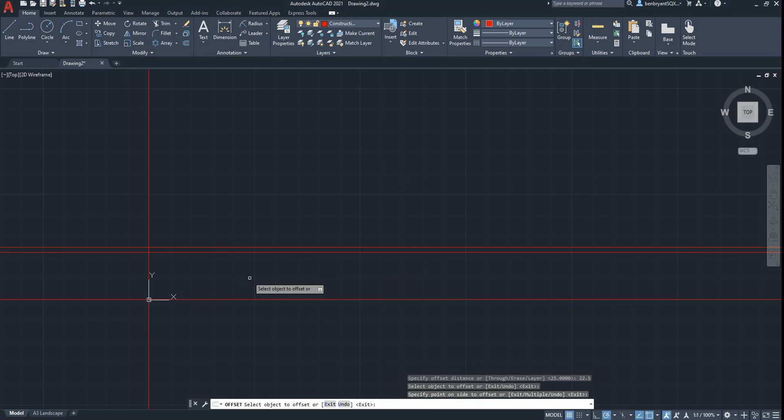Apart from there is the end section, which is against 25, so I'm going to put that as 12.5. And again, there's another kind of chamfered component on there, but you could put that one in. It's just be 2.5mm less from our view, but I'm not going to worry too much. I'm going to use the chamfer tool rather than hand draw the chamfer anyway.

Offset, okay, 65 coming across. I've got 10 coming back, I've got 8 moving forward. 15 off of the 8, and last one 28, which my brain can only hold so many numbers in, like so.

So it may not seem like it, but that's the actual half view for the screw jack. And a bit like if you're not happy with colours, working in layers, feel free to change the layers, make more, or change to the colour output, like what we've done on the casting video, which is day 19 if you haven't seen it, and then day 20 is the other piece as well. So into my drawing layer.

I haven't bothered to put any of the other sort of rundown components, because what I'm going to do is that traditionally, if you look, there's a type 2.5 chamfer, which means it's 2.5 across, 2.5 high, and it'd be 3.54 if you use the Pythagoras to get the actual diagonal.

What I'm going to do is I'm going to use AutoCAD. Most people would normally do this: offset 2.5, so you come 2.5 out by 2.5 down, which essentially is the 45. And what you would do is you bring a line in, and then you measure it and you get that to be like 3.58, 3.54, okay. So that's one way to do it.

But we're a bit more sophisticated than that now, we're actually just going to use the Chamfer Tool. So loading the chamfer tool, it asks you then for the first line, so we want distance, we know it's 2.5, second distance is 2.5, M for multiple. We can come along now and chunk out those sort of pieces.

So we can actually build our lines this way. Now what you're probably looking at here is that 45 is actually the bottom line. I've just drawn one big kind of area, so actually what I need to do is remove those ones off. That line should technically be there, and then I can actually now redo the chamfer.

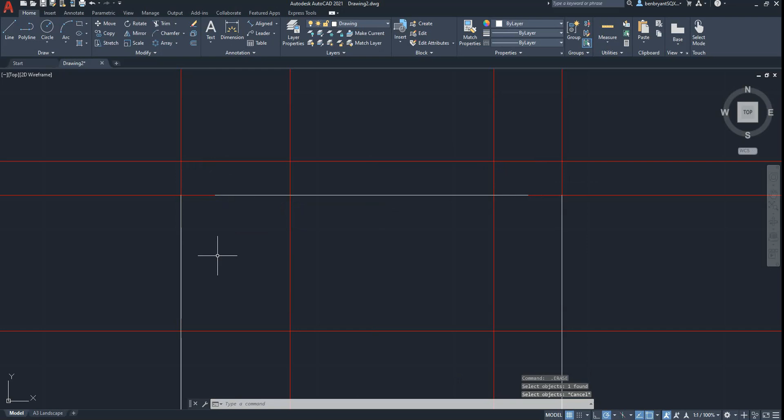Okay, so now I'm going to bring it along, and I've got another piece which is on the 50 line. I know the measurement is there to there on that one because it's the 15.

So again, using the chamfer, draw a line down like so. Now when you look at the drawing, it includes the chamfer, so we know that bit's right.

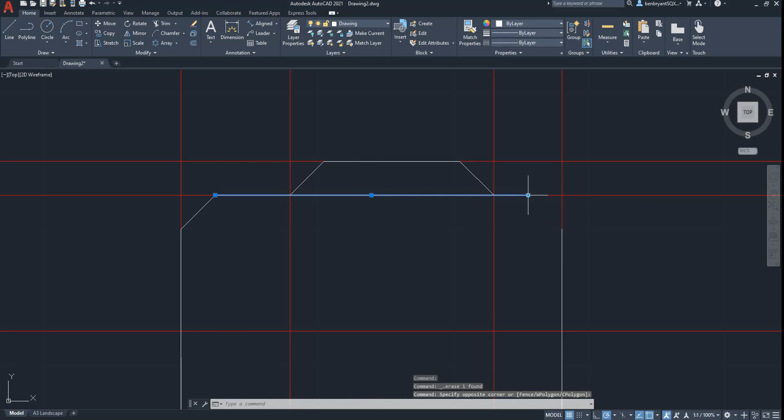Then we have the 28. So it's not actually a chamfer on this side because it extends into our larger chamfer. So I'm just going to close this one back off, like so, and I can just trim out that middle section so I've got my profile like so. So that's our first kind of up, chamfer, cross, chamfer, down.

So we're at the 28 lines. Now we're going to do our 10. Again, I'm just going to do exactly the same. It's just going to come up here, across, and then it should be an angle of 20.

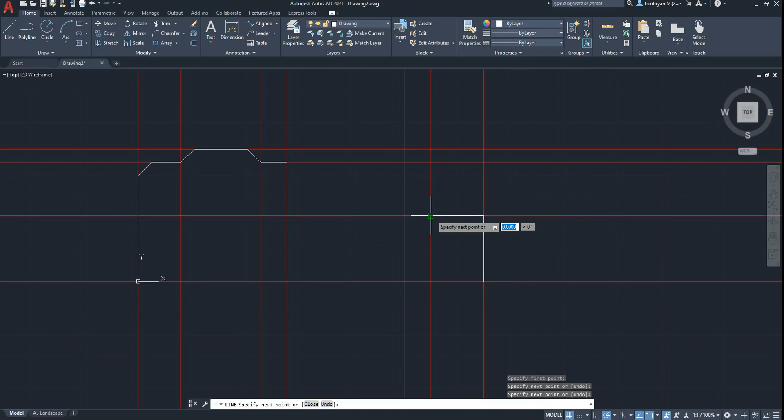So again, we can test the angle if you've done it right. 160, or 20 internal, which is correct. That's what the angle is saying there.

So we've got to do a chamfer on the end. Again, 2.5, which we're happy with. And pretty much that's the first profile.

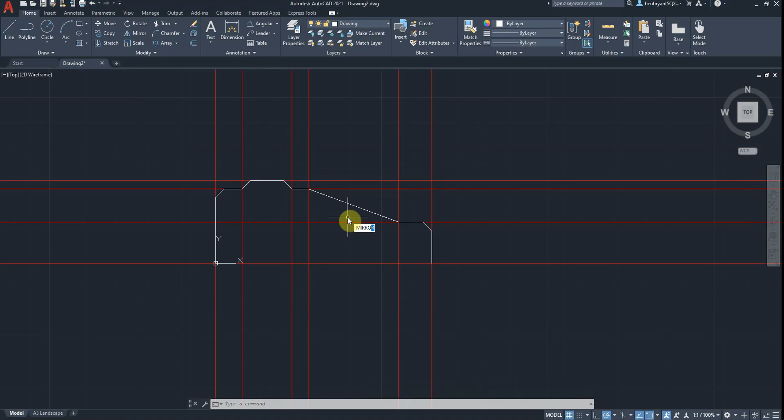So then again, mirror now, and then you can rotate around. Now before I do that, if you notice, I've got lines coming down, so I'm going to put all those lines in first, because it means I'm not having to cover twice the distance.

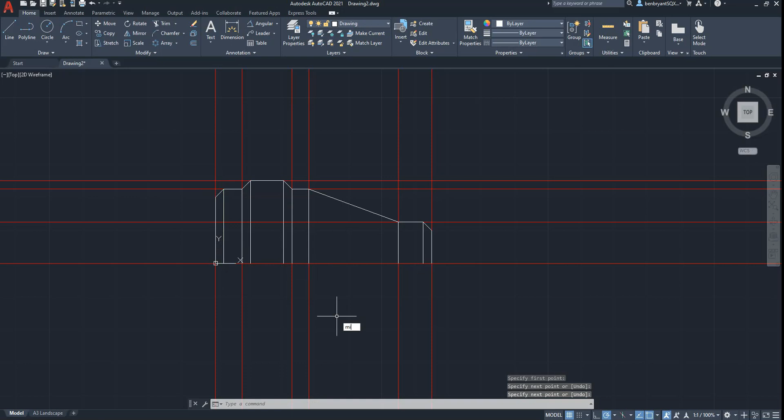Okay, remember to do the chamfer ones as well, so just a bit of quick flying around. Because if you're like me, sometimes you always forget to do the easy stuff first and you end up spending twice the amount of time.

Like so. So there's our first kind of shape, nice and straightforward. Okay, remember to give yourself some room. So I've just given myself a 50 distance, simply because it's 50, so I've got to keep pressing the command, and just build like a center point.

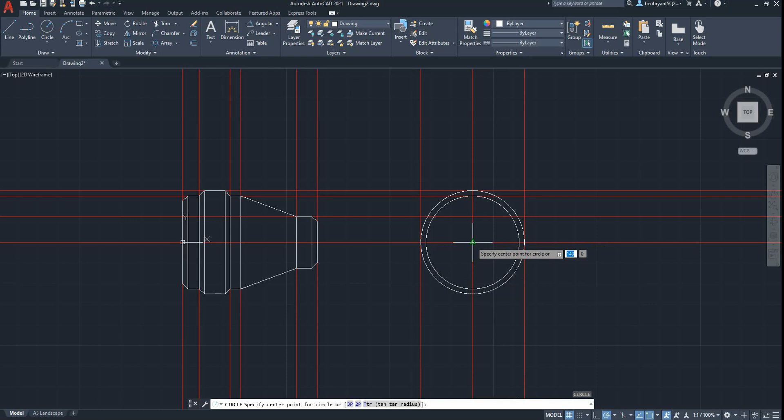And then just come in radius 25. Offset, which would be the 2.5mm chamfer in this stage, coming in. Last one, 25 diameter circle. D25, offset 2.5, and that's then built my circles.

So I've got both views now. Okay, so next thing to do, I'm just going to do another offset. I'm probably going to offset 25 to get the bottom, and then do probably 50 again. And then what we're going to do is put this other section in.

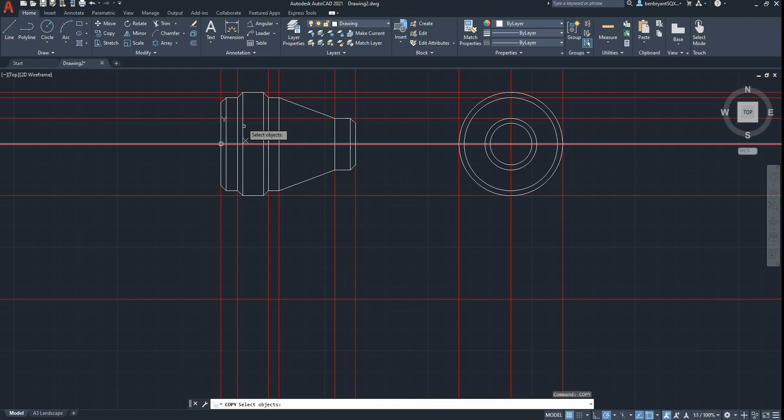So what I'm actually going to do is, rather than draw the profile again, I'm just going to copy this one down, like so. And what I can now do is I can now strip apart the external with the internal.

So I'm going to put in some key lines so I don't delete too many, but I need to put 30 into 15 from the center. So, offset 15.

15 up, 15 down. Now again, if you've seen other videos, you can either make another layer, so I've got a vision layer which I'm going to use, or you can just change it by color on there as well. You've got 15.

This one here I've got to do is 12. So I'm going to do offset 6. And again, just choose those two into my vision, like so.

And obviously then this is M12 times 1.75, so there's a thread in there as well. So what we're going to essentially do is offset 0.875, which is half of 1.75.

Now, people always say, oh, you need to double check this. It's because it's a drawing, you're going to put a tap and die, so your operator that puts the tap in should know what size. So it's 10.2mm drill, and then you tap out to M12.

So technically speaking, I've actually just done that the wrong way around, so you've got to make sure that you're internal, not external, because the external is 12. 0.875, like so. There we go.

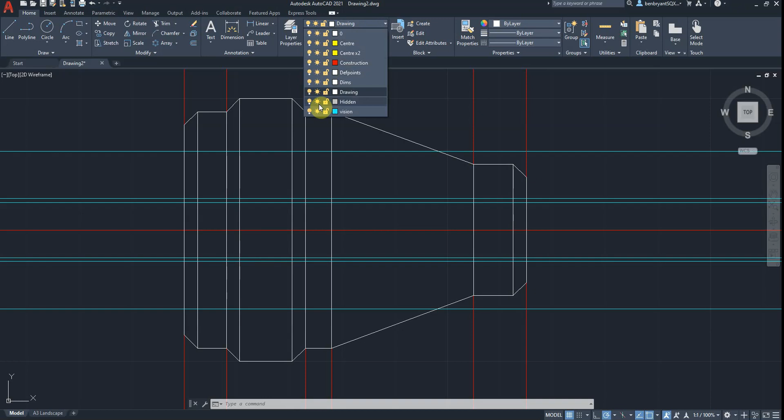That's that section now. So again, all I've got to do is just draw. Now if you actually look, this line matches up with that line above, so all I'm going to do now is just turn this stuff off, which may seem a bit bizarre, but I'm going to turn my construction line off as well.

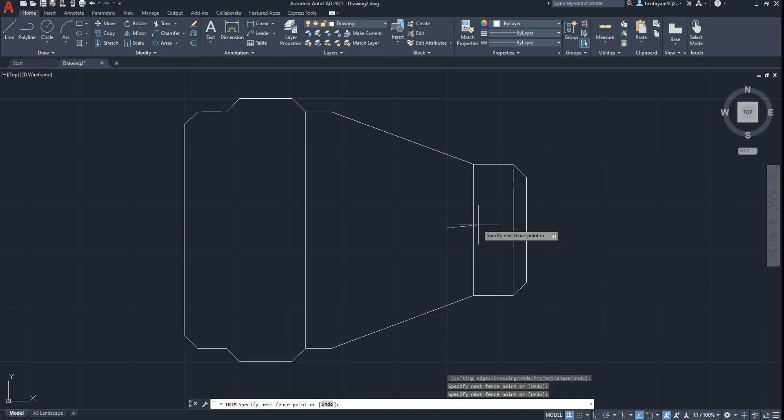And now when I operate the trim, I need to get rid of all of that, all of that. Okay, coming back, no other lines exist, so let's get rid of that one and that one. That line there is a manual line, so I can get rid of that one and that one.

I think I can get rid of that one as well, and get rid of that one. I need to keep the external one.

So those are the lines that I've just had to bin off. I'm going to put my construction back in. So what we're going to do is draw a line. Again, you can just do it in half if you really want to. Bring it up to the point of that line, which is like our first rectangle bit there, this bit. Then we've got a 20 line. So now I'm going to bring the 6 in.

Okay, we don't know where this meets, so I'm just going to drag it through, and then all I'm going to do is just bring a line. So 360, bring a line through, so 360 minus 20, so 340. That does seem a bit aggressive there, so we're just going to double check.

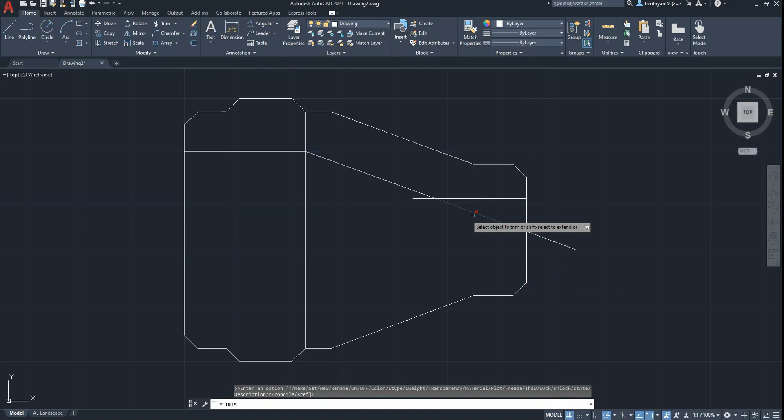There we go, 20mm. So again, now we can basically trim this back. Again, turn your layers off so you don't have to trim multiple times. Get rid of that one, get rid of that one, get rid of that one. So that's like my inner profile now. So we just put these ones back on. Okay, that's like my inner profile for my line.

So the 12 should be longer than the 10 essentially. So I may need to actually bring that line. If you latch back on, hopefully, and you get that kind of green line, let's say. Now what we need to do is bring our secondary line through, which will be like the bottom of our thread. Again, then trim that out, like so. And you know that the thread will have a little lead in, so...

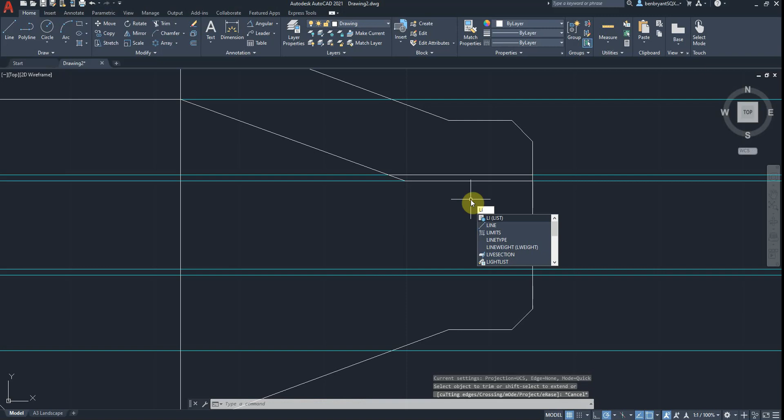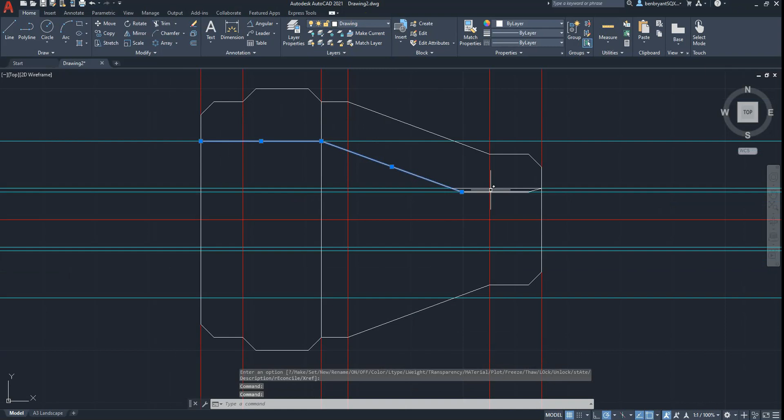Which we've matched up to the lines of the chamfer, to be fair, like so. That's sort of what we're going for here now. So all we're going to do is, if I populate the construction line back in, I get my center line. 1, 2, like that, mirror around the center point, keep the original source.

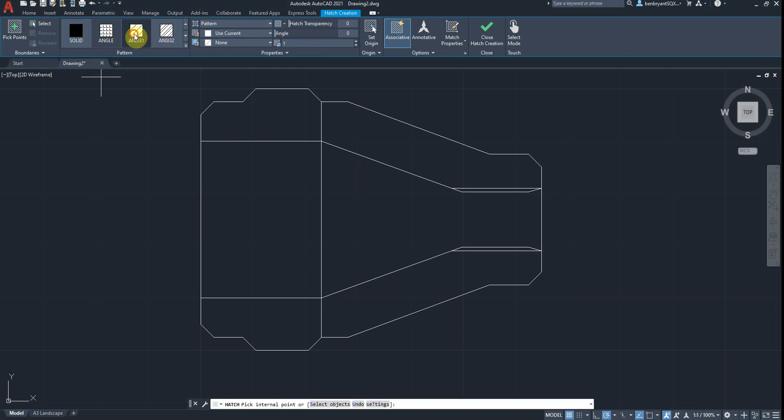Now I can turn all these lines back off again. Like so. So that's sort of the section that we've now got. And that's our 30 point, our angle 20, got our thread. So all we need now to do is put the hatch in this one. So again, just going to use ANSI 31. Like so, there's my hatch, just to say it's the straight through.

So what we can now do is actually make another layer. So we're going to call this section view. I'm going to change the line type to like a phantom line. So we go into line type phantom. Okay, so I want it white.

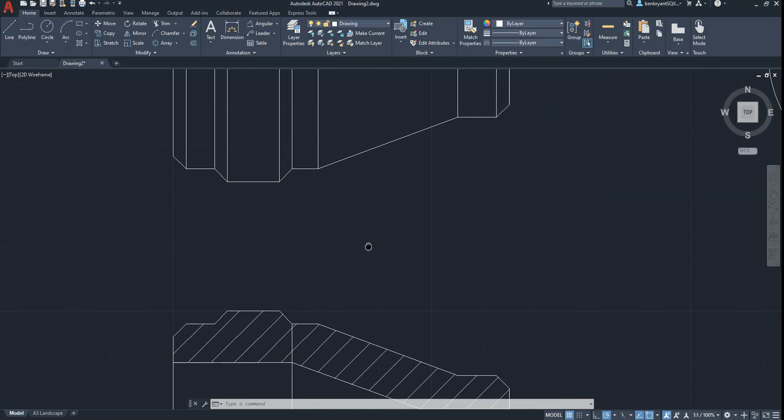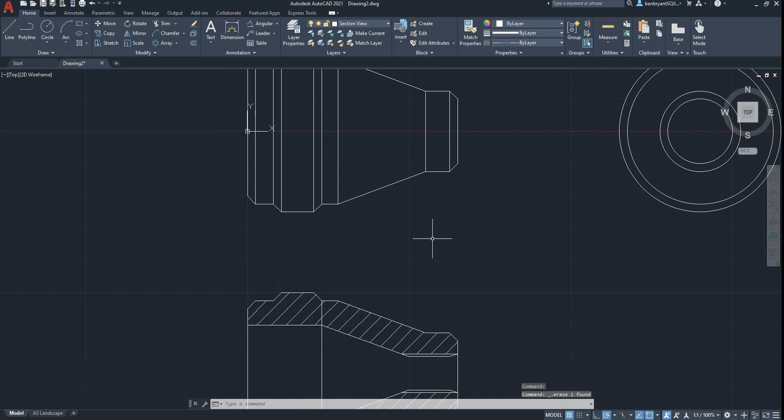And what I'm going to do is on my section view, if we basically draw a line, you get this weird kind of double dot. And what I'm now going to do is make it thicker, so I'm just going to change the default line weight to 0.5, just make it a bit thicker. It basically represents then a proper section line. So you don't really see a difference, but you see the difference on the output of the printing.

So all we're going to do, turn our construction lines back on so I can match up the centre line. I'm going to do 20 mil over, so I'm going to find a point, drag it over and type 20 in, and then come to my last point is 85, so that'll be 105, I'm now going to, like so. So there's my sort of my line.

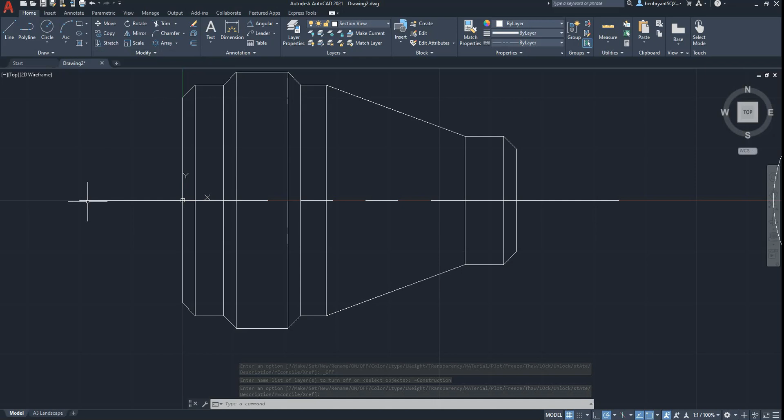Now I need an arrow pointing up to say that this is the bit that I've sliced. So I'm going to do a Q leader. I'm going to do that 2.5 mil high, or maybe a bit more to get the arrow in actually. Oh, okay, it's just going to rotate my line.

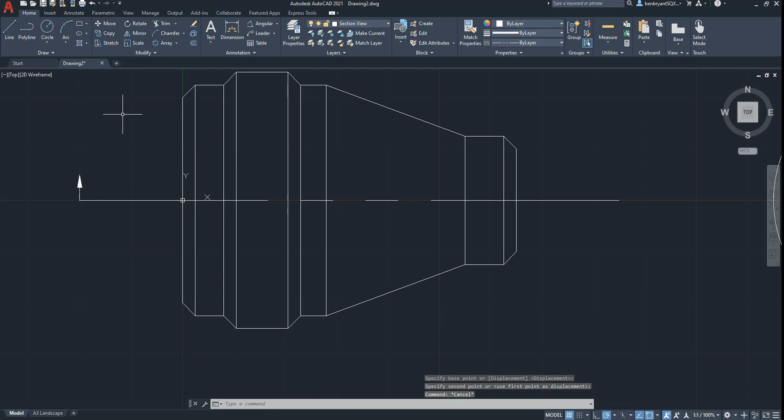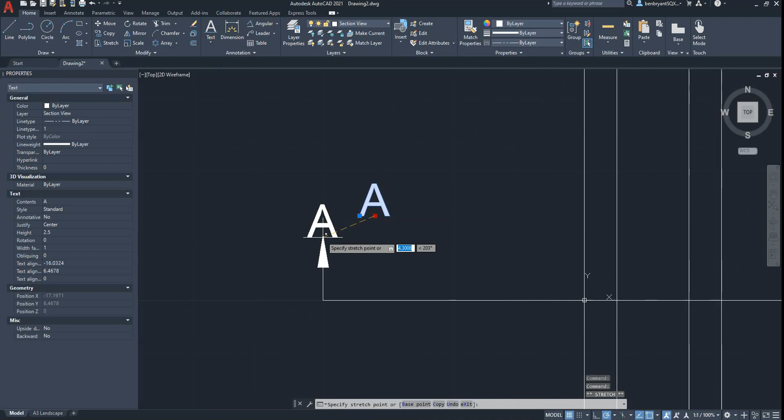Now you kind of have the arrow like so, so you're saying that you've sliced it in this sort of direction. So now I'm going to do a single line text, 2.5, 0 rotation, I'm going to call it A, enter twice. Now what you can sort of do in the properties window is you can lock this to a center, center like so, and then that'll give me a little snap point for center which I can match up to the top of my arrow essentially. Like so, so now I've got like a little A.

Mirror that one. Find the center point of the line, which is that triangle there. Like so. Now I've got a little section view.

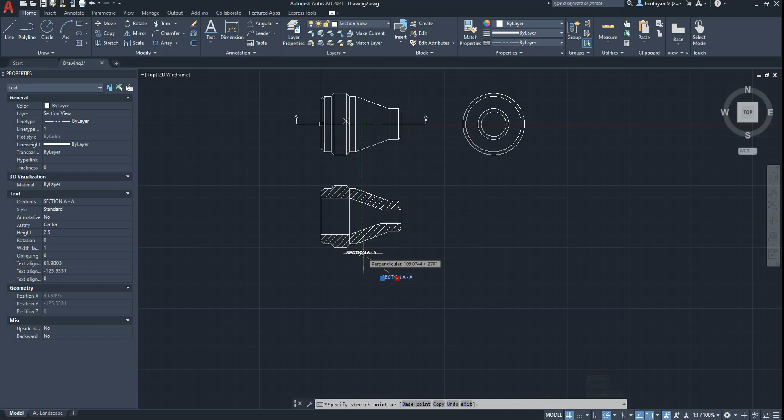And all I need to do now is come down here, 2.5 again, 0 rotation, section A, AA. If you did like 3 or 4, you can sort of turn around and match up like a B, C, D, E, 1, 2, 3, however you want to do it. Again, find the center point of that line, get it in the center point of your viewpoint. So last thing to do on this one, this is just our dimensions.

So again, do what I normally do, run all the linear ones first. I'm actually going to turn the construction lines on, so I've got a base point to work from. So it's 65 overall.

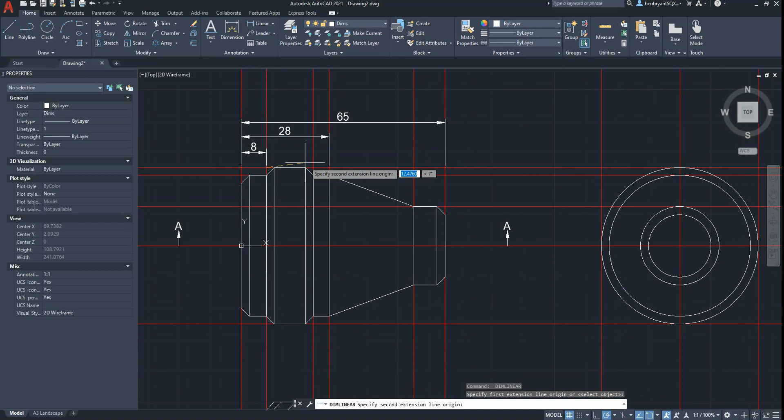Then we have 28. That really annoys me when it does that. 28. Then we have, is it 8? We have 15, like so. We have a nice little 10.

We have the 45 line. Let's hope if I get the right points, I suppose. One thing to remember here is that the 45 is going to have a big fat line over it. If you saw on mine, it wasn't very clear, so I'm going to just drop it down a little bit so it's nice and clear.

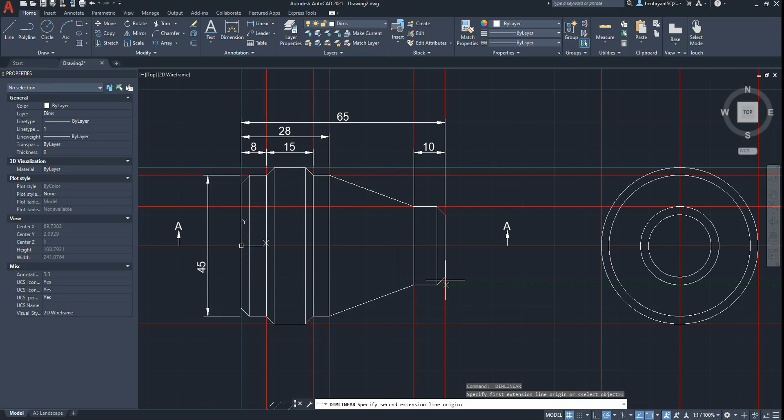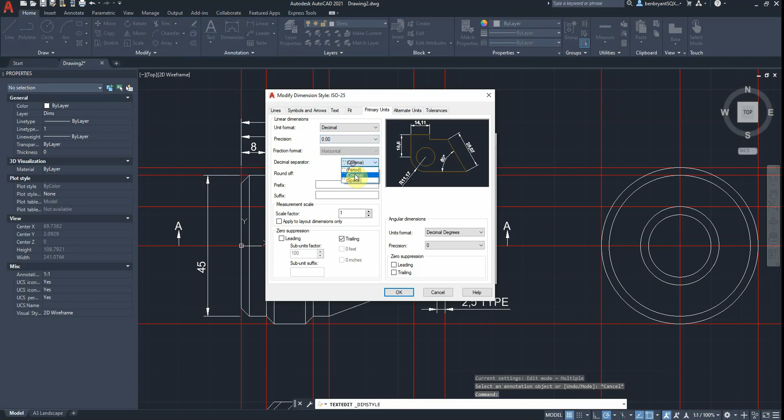We've got our chamfer. Now it's a 2.5 type, so you're just going to put type in afterwards. That's basically a type of chamfer. And if you notice, my annotation is also, if you're going to manage the style, it always says comma. It's because it's an ISO metric, so I'm just going to change that to period to make the full stop.

Okay, last one I do is across the top here. Try and match it all up, make it look neat. Then you can do the 2R, 25 in diameter.

Like so. Now on there it says medium knurl. If you didn't know what a medium knurl was, you can probably type that in. Also, what you can do with a medium knurl is you can draw a little circle like that. You can hatch that circle.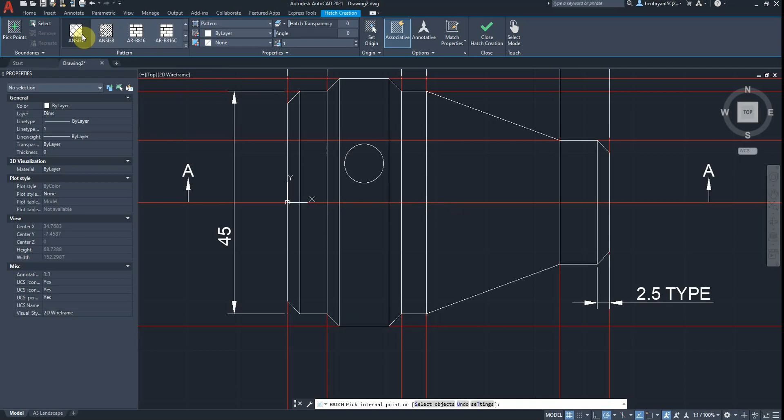Maybe try 32, a bit more of a hatch. So my hatch has got quite a few lines, or actually if I can do the cross. So you use the ANSI 37, and all you do is you just delete and that symbolises a medium knurl. You could also put that in there if you wanted.

And all I did was remember percentage C will give you the diameter, and then I just basically put medium, medium. Like so, and then if it doesn't fit right, you think actually it's overpowering my 50, you just change the height a little bit. There you go, 50 diamond knurl.

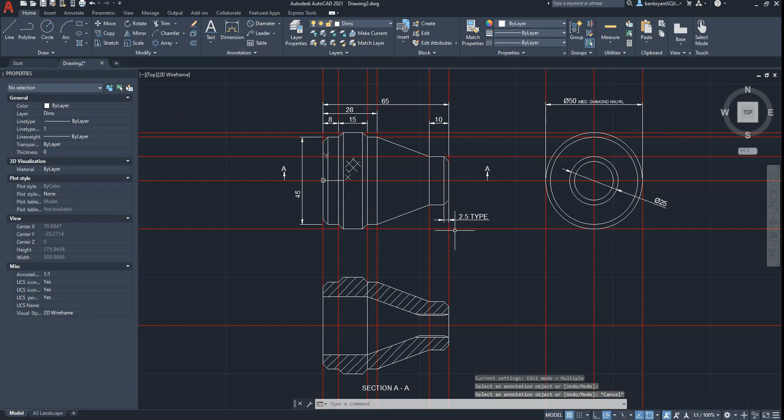I've also got that diamond knurl symbol there, so that's going to do. Put little bits on the internals for the linear one. So we've got linear there.

Okay, being a bit of a pernickety engineer, make sure everything's lined up. It just makes it so much more neater. Same again, coming in.

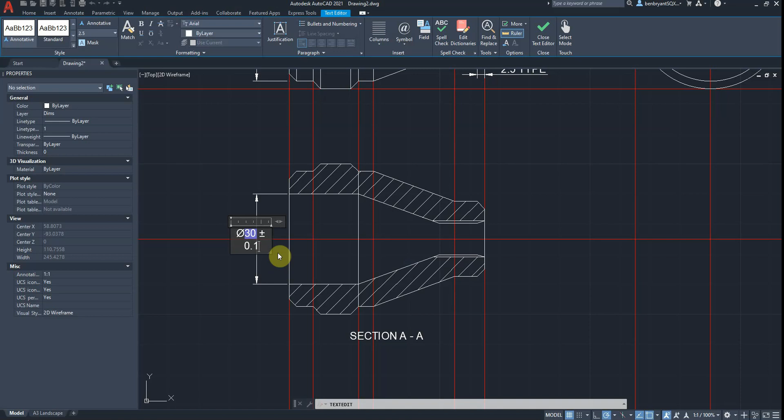See, remember this has got a plus or minus, so we're going to do percentage. Plus, minus. Oh, I can't remember what it is. Yeah, oh, it's P. So plus or minus 0.1, which is like essentially the tolerance.

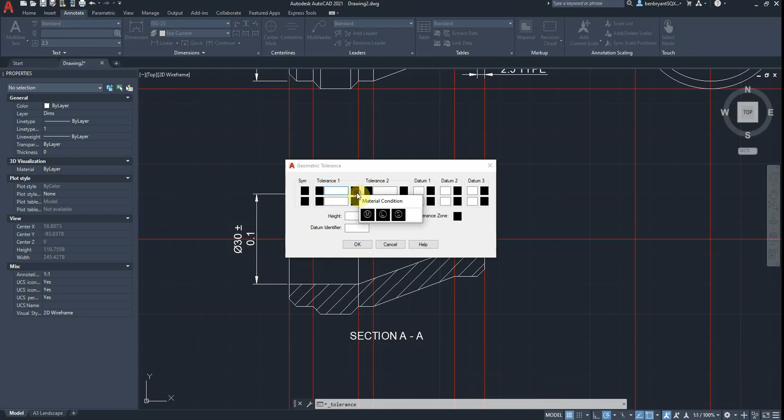Also, you may or may not have known this. If you go to annotate, come into dimensions, there's also a little tolerance band, so you can put obviously like symbol, if you actually knew the actual tolerance. You've got plus or minus on it, but some systems have plus or minus. But yeah, you can actually put a tolerance in there properly. Then, if you knew it was like cylindricity or perpendicularity or parallel, you can put that in there.

Last thing to do is just on the end. Okay, select the 12 again. 12 times 1.75. No, not enter twice. Just close the editor. That'll pop it down there, quite nice for you.

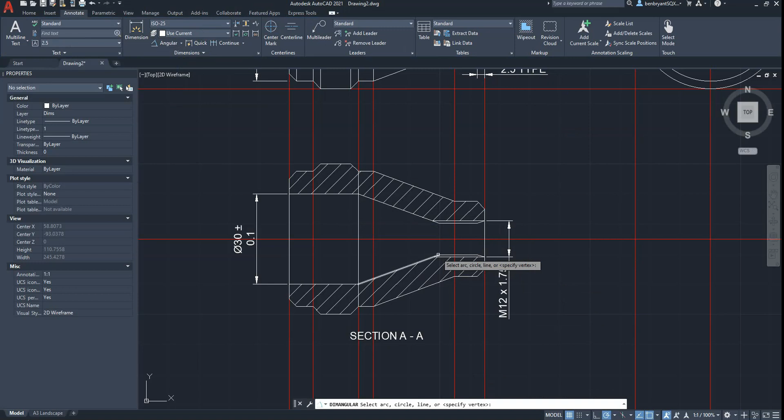We can do some angles. Again, the 20 sometimes works really well. Other times it's a proper pain to put in. Like so. Remember, you can always move these. You're not locked to anything.

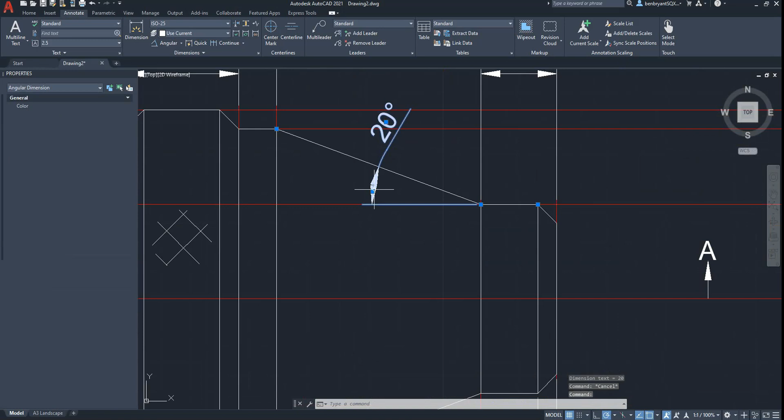Like so. I mean, that doesn't look very clear either, so let's just drag that slightly more. And you can always drag the, like so. And then that's that piece done.

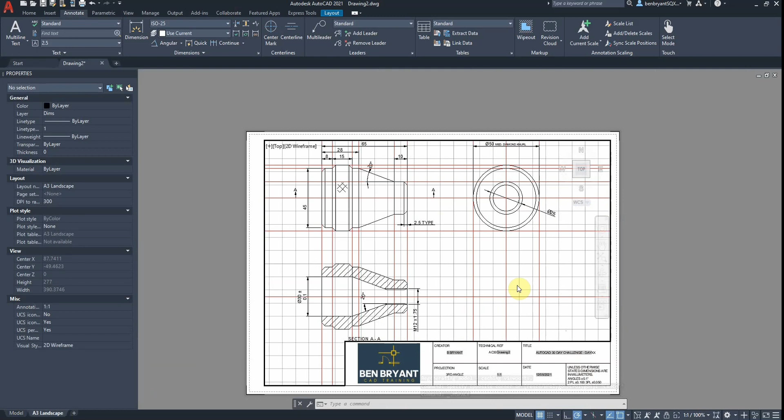So okay, so then just outputting it onto a drawing, and because I've done my section view properly, I can sort of bring it into a maybe 1.5 scale. I might get lucky, but I positioned it quite wide, I think. So yeah, if I did a bit of annotating, drop some stuff around, I can get a 1.5 scale and then come out to plot.

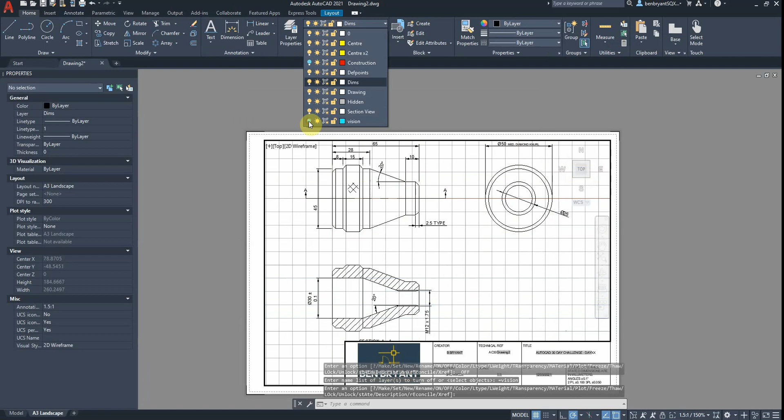And like I said earlier, the line type didn't really change. Oh, I didn't turn my, so if I turn off the lines on it. Okay, back to layout, plot. Okay, the lines then come through a bit more thicker, which is quite nice. So basically, just got to move some bits around to make it a bit more tolerable.